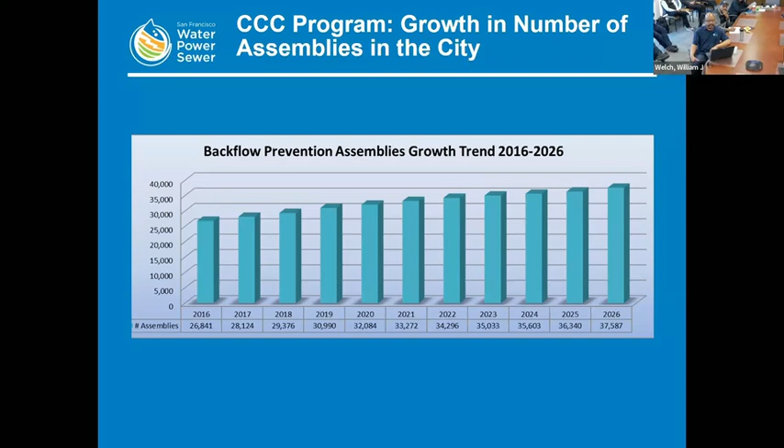In 2025, the number of assemblies in San Francisco grew at an annual rate of about 2%, increasing by over 700 assemblies. The testing business continues to expand, and we expect to have over 37,500 assemblies in the city by the end of 2026. Instructions for authorized backflow prevention assembly testers have been updated and will soon be posted on our website, available at sfpuc.gov/backflow.

Last September, we revised our rules and regulations, Section G, so it aligns more closely with the state cross-connection control policy handbook. These regulations apply to testers, specialists, and companies that employ them. So I highly recommend that you read them. There is a link to Section G on our website at sfpuc.gov/backflow. We also submitted our cross-connection control plan and program manual to the state as required by the policy handbook. The draft is also available on our website.

Water Quality Division now requires that all buildings 4 or more stories tall or with water supply more than 40 feet above the water meter have RPs at the point of connection. Water Quality Division may allow double checks instead of RPs if flooding is a concern, meaning that an RP would create a substantial risk to life or property. The property owner would have to apply for a variance from Water Quality Division. DCs installed before 2026 are considered to be in compliance, although future replacements must be with an RP unless Water Quality authorizes a double check.

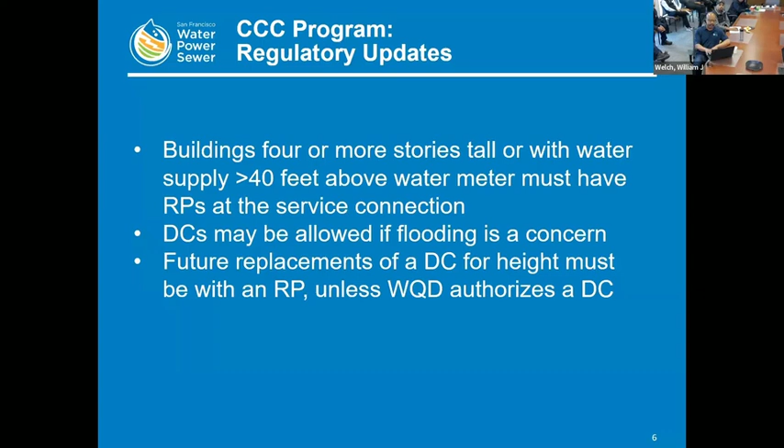We met with our advisory committee of volunteers from the tester community last October. We really appreciate the committee's feedback on our cross-connection control program. We discussed how different jurisdictions are conducting hazard assessments, which are required by the state's cross-connection control policy handbook. It was also suggested that Water Quality Division might require testers to use the only gauge approved by USC, which is a 3-needle valve arbiter. However, Water Quality Division currently has no plans to require this upgrade.

Also at the meeting, we were asked about procedures for restricted spaces. If you believe that an assembly is in an unsafe location for testing, contact Water Quality Division, and if applicable, we will work with Environmental Health and DBI to try to address your concern. Please send us pictures of your safety concerns.

We had a question about DBI approval or rejections of drains for installed RPs. If you have a specific question, you can ask DBI during the question and answer period or as issues arise. We had a question about whether failed or unrepairable DCs on buildings with low hazards could be replaced with double checks rather than RPs. Building owners may apply for a variance, which Water Quality Division will consider on a case-by-case basis.

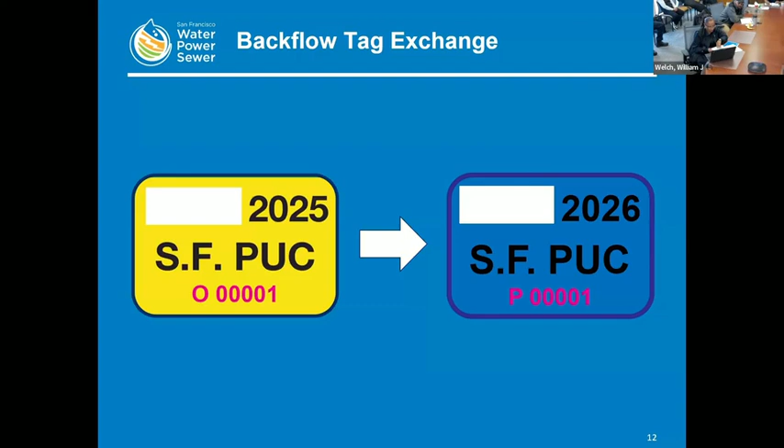We are currently in the process of upgrading our assembly tracking software to replace CCAMS. The new software will have similar capabilities as CCAMS, but will have a better user interface. It will be more manageable to navigate, find information, and enter test results. We will keep you posted as production approaches final stages. Testers will be notified in advance when it's time to register for the new software. Water Quality Division's software team will provide guidance on how to use it before the official launch.

A few things to keep in mind about CCAMS accounts. If you work for more than one company, you need a separate email address and password for each company. For example, if you work for 3 different companies, you'll need 3 separate accounts. To add an account, contact Water Quality Division. The contact information is given in the instructions for testers on our website. When entering test results, be sure to enter them under the company you are representing for that location.

CCAMS allows separate administrator accounts called supervisor accounts. These accounts provide a delegate to have read-only access to all the test reports submitted by the company. The person does not actually need to be a supervisor. If the supervisor is also a tester, he or she will need a separate tester account to enter test results.

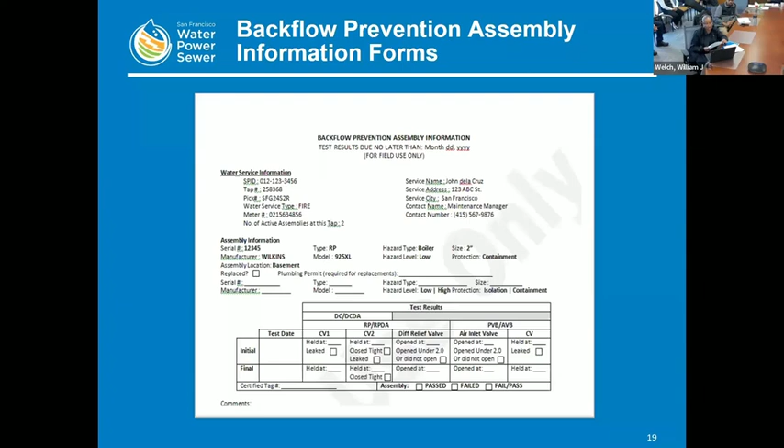Be on the lookout for multiple service connections, especially when testing at an unfamiliar location. There can be more than one PIC number, each associated with a different service connection. Very often, customers are not aware they have more than one service connection and mistakenly think that multiple notices are duplicates.

Remember that customers can authorize their testers via email to get PIC numbers directly from SFPUC. For example, if you notify your customer via email that their assemblies need testing, copy backflow@sfwater.org on the original message and ask the customer to reply all to authorize the release of the PIC numbers. PIC numbers will be emailed to the testers within 1 working day.

Alternatively, if a tester can provide Water Quality Division with written proof of customer authorization for testing, the Water Quality Division may release PIC numbers directly to testers. Proof might be a testing contract or email correspondence between the tester and the customer. And of course, if your customer is signed up with a CCAMS account and selects you as a preferred tester, you'll automatically receive the notices of testing due with PIC numbers.

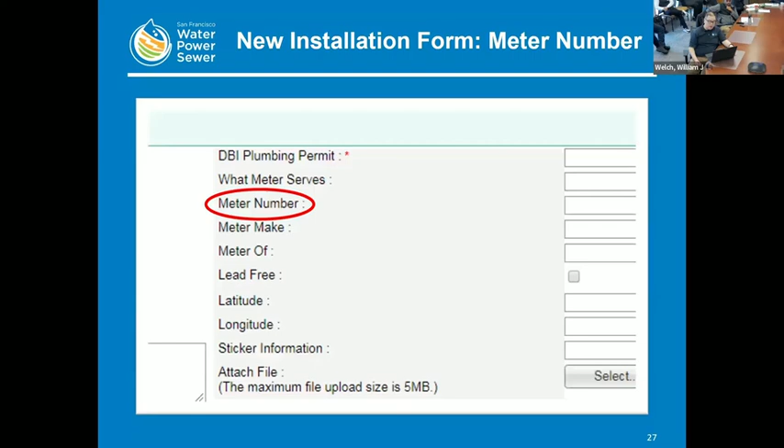If in doubt, contact Water Quality Division and we'll check CCAMS to see if the assembly's serial number has already been entered. If an assembly has a backflow prevention assembly information form, it's already in CCAMS and test results should be entered using the PIC number on the form. When entering a new installation, start on the Assembly Management/Add Assembly tab. Please enter the meter number at the service connection because it's really helpful for associating the correct customer with a particular backflow prevention assembly.

Enter the assembly orientation. The drop-down menu on the new installation form only includes USC-approved orientations, so you won't be able to enter an incorrect orientation. You can also check the correct orientation on USC's website at usclist.com. If a correct orientation is not shown in the drop-down menu, email Water Quality Division at backflow@sfwater.org.

If we confirm the orientation on the USC website, we'll add the orientation to CCAMS. The same goes for make, model, and size. If CCAMS is missing a USC approved assembly, please let us know. You can't rely on an assembly cut sheet. Assemblies must be installed in the orientation approved by USC.

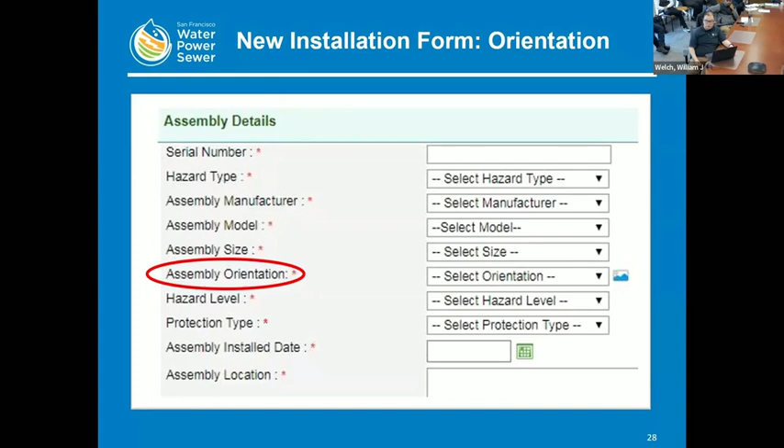If you're not familiar with all the orientations, USC provides an orientation key for reference. These orientations should be used when you are entering new installations or updating assembly information in CCAMS. Be sure to note the direction of the water flow through the assembly and the shutoff valves.

If a new assembly is in violation, check the in violation box in the unable to test section. Examples of the violations include modifications, incorrect orientation, or an assembly that is not on USC's list of approved assemblies. If you cannot test a new assembly for a different reason, email Water Quality Division with the assembly's make, model, serial number, size, location, and hazard if you know it.

For example, you might not be able to test because an assembly has no water supply, or the customer will not give you permission to test it. Once we have the assembly information, we will enter it into CCAMS and send the customer a notice to test the assembly. For an assembly not on the site's paperwork with a backflow tag that is out of date, call Water Quality Division, which will either provide a PIC number or ask that the assembly be entered as a new assembly.

A quick comment about the comments field. CCAMS gives testers several opportunities to enter comments. Please only enter information that is actionable for the water quality staff, such as a correction for a serial number, a hazard, protection type, or assembly location. If any part of the serial number, make, model, and size needs to be corrected, please provide all the information for the assembly. Please do not leave personal field notes that don't need to be reviewed by water quality staff.

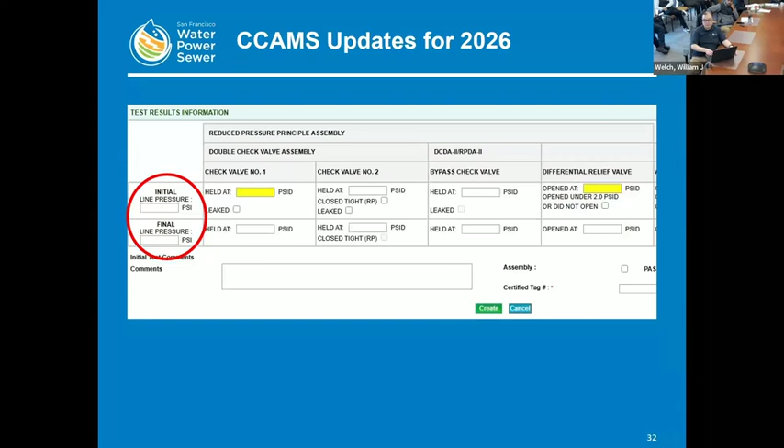Effective today, we now require that testers record the initial and final line pressures for all passing tests in CCAMS. CCAMS now accepts results of air gap inspections. So far, Water Quality Division has been inspecting air gaps, but starting today, we will accept inspection reports by authorized testers and specialists. To access this screen, go to the Assembly Management tab.

To add a new air gap, click on Add Assembly and choose Air Gap. Obviously, a serial number isn't applicable. Neither is the assembly information. You will need to enter the supplied pipe diameter and the distance of the air gap. If the air gap conforms to California Plumbing Code requirements, affix a backflow tag on the supply line near the air gap, if convenient, or other suitable locations.

For new installations, please submit 2 photos, one close up, preferably including a ruler or a gauge next to the air gap, and 1 photo showing the affixed backflow tag. For an existing assembly, you'll use a PIC number to reach this screen as you would for an assembly. For existing assemblies, please submit a photo of the current affixed backflow tag.

You must select whether an assembly is for containment at the service connection or isolation of an internal hazard. The choice affects the hazard types that are available in the drop-down menu. Consider asking the building owner or the building manager what the assembly is supplying water to if it isn't obvious. If a hazard isn't in the drop-down menu, please select Other and describe the hazard in the comments field. You can also email Water Quality Division to ask about adding a new hazard.

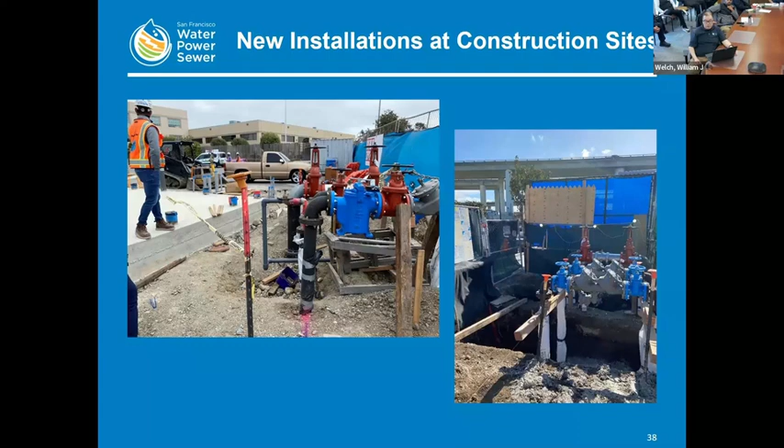Sometimes you might be hired to test assemblies at construction sites before the address or eventual owner has been determined. You might be given an address that is only temporary or one address that is associated with multiple buildings. When the Water Quality Division later tries to associate assemblies with the correct water service, it can be difficult since the address might have changed. In these cases, it would be very helpful if you can provide photos of the surroundings to provide context.

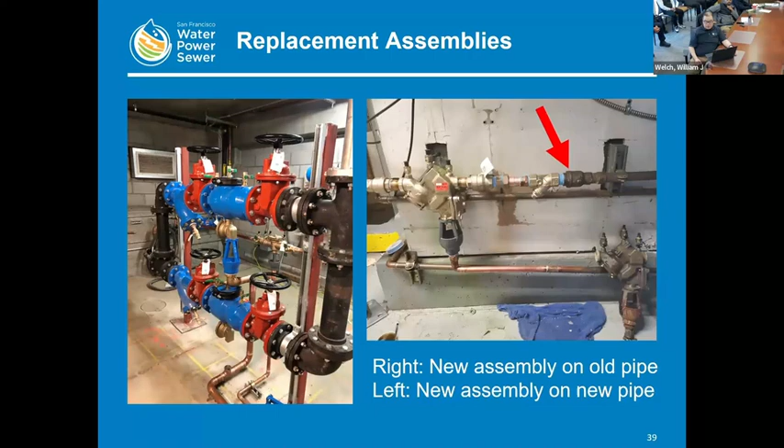There's been some confusion about when to enter an assembly as a new installation or a replacement. An apparently new assembly that has a serial number different from the one on the site's paperwork, but the same size and type of assembly supplying the same piece of equipment in the same location, is likely a replacement. Inform Water Quality Division and upload photos using the request feature in CCAMs. Shiny new assemblies without a backflow tag on new piping are obviously new and should be reported on the new installation form. Don't worry if you didn't do the replacement yourself. We just need to be able to link the new and old assemblies in CCAMs.

When an existing backflow prevention assembly is being changed out, the new assembly must be entered into CCAMs as a replacement assembly. If the assembly being replaced was tested, be sure to record the results of the test in the initial test area of the form. For the new assembly, mark the checkbox next to replacement information below and enter the replacement information in the fields provided. Then record the test results for the new assembly in the final test area of the form.

It is important that the information for both the old and new assemblies be reported on the same form. That way, the correct serial number and associated assembly will be inactivated, and the old and new assemblies will be tied together in CCAMs.

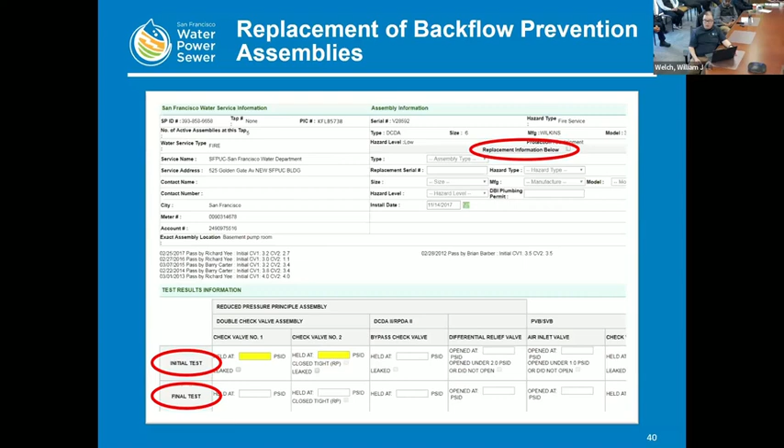Entering the replacements in CCAMs can be a bit tricky when DCDA Type 2s and RPDA Type 2s are involved. CCAMs considers a DCDA and DC bypass to be different assemblies requiring 2 tags and 2 entries for test results. However, a DCDA Type 2 or an RPDA Type 2 is considered one assembly in CCAMs. Therefore, sometimes a replacement is considered 1 for 1 and sometimes 1 for 2 in CCAMs.

If an assembly with a bypass is replaced with a DCDA Type 2 or RPDA Type 2, then report the new assembly on the same form as the removed main line assembly. Report the removal of the bypass assembly separately by selecting Unable to Test and then Removed.

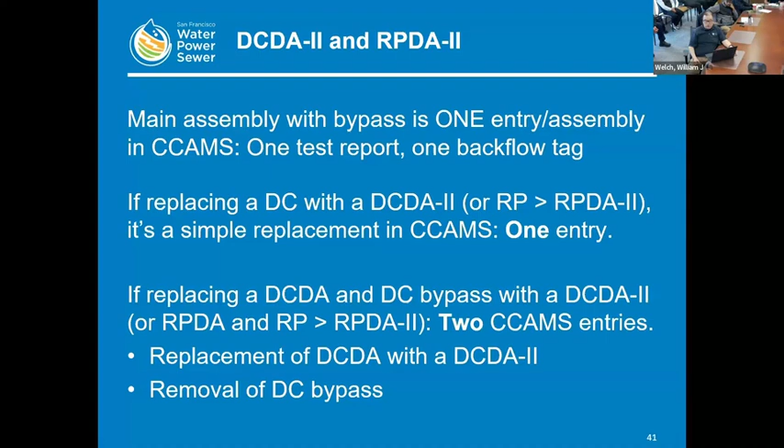If a DCDA Type 2 or an RPDA Type 2 is replaced with an assembly having a bypass, then report the new mainline assembly on the same form as the removed DCDA Type 2 or RPDA Type 2, and report the new bypass assembly as a new installation. Be sure to report the removal of bypasses in CCAMs. This is important because otherwise your customer will receive a test notice for the removed bypass.

Removals must be recorded in CCAMs. For example, if you get to a site to test an assembly and it isn't there, report it in CCAMs. Go to the Unable to Test screen and check Removed. Enter the plumbing permit ID if you know it. If not, click the No Permit button and the assembly will be referred to Environmental Health as removed without a permit. This screen has options for other permitting jurisdictions besides DBI.

You will need to enter whether or not the hazard was removed along with the assembly, for example, a boiler associated with an RP. You will also need to confirm the hazard type. If you happen to know that the assembly will be replaced, for example, as part of a remodel, report that removal of the original assembly as soon as you are aware of it.

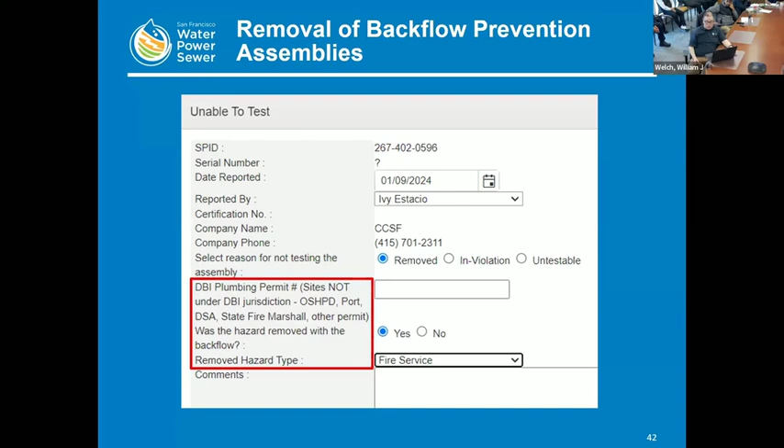If you are hired to test the replacement assembly sometime later, do not enter it as a new installation. Just send an email to backflow@sfwater.org and we will reactivate the removed assembly in CCAMs. Then you'll be able to enter the results for a new assembly on a replacement screen.

If customers want to provide Water Quality Division with preferred contact information that is different from their billing contact information, they should contact Water Quality Division at backflow@sfwater.org. You can also change test dates to another month or sync multiple accounts. For the initial change, some assemblies might need to be tested more than once in that year of the change.

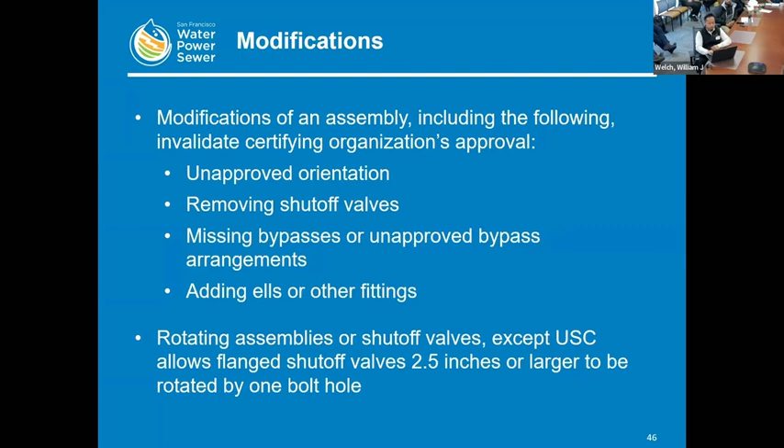The only exception allowed by USC is that flanged shutoff valves 2.5 inches or larger may be rotated by one bolt hole. The USC Foundation identifies an assembly as a unit from shutoff valve to shutoff valve. Therefore, modifications between the shutoff valves are considered modifications to the assembly and are not allowed. On the other hand, modifications upstream of the number 1 shutoff valve or downstream of the number 2 shutoff valve are not considered modifications that would invalidate approval.

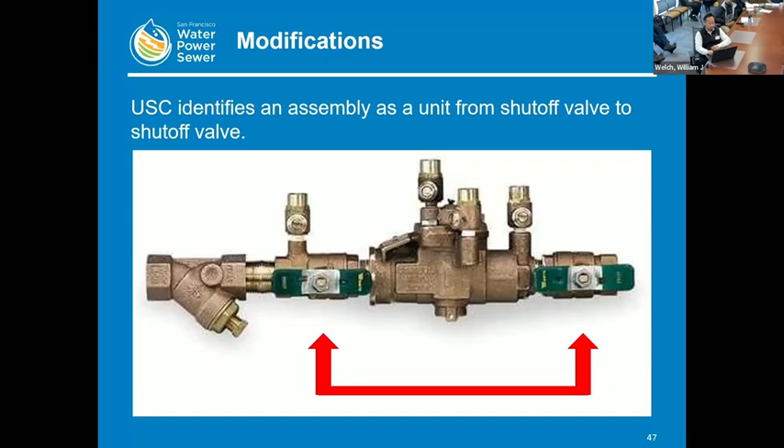For example, placing a Y strainer upstream of the number 1 shutoff valve is allowed. However, if the Y strainer is installed between the shutoff valve and the main body, it is considered a modification, and that invalidates the approval.

Reporting in-violation assemblies. Testers are responsible for identifying and reporting problems in the field. In particular, if you see a cross connection or observed backflow, report it immediately to Water Quality Division by emailing or calling the same day. Please do not assume that an assembly is approved if it was just installed or tested previously. If you find an assembly that has been modified or is in violation for some reason, report the information in CCAMs by clicking the link Unable to Test.

Then select In Violation and choose the violation types. Please select all violations that apply and describe them in the comments field. Do not test the assembly and do not submit a failed test. The violations will need to be corrected before the assembly is unlocked and tests can be submitted in CCAMs.

After submitting an assembly as in violation, you have the option of uploading photos of the untestable assembly. The upload screen will look like the one that Water Quality showed for new installations and replacements. Please use this upload functionality instead of emailing photos directly to Water Quality.

Violation types. When marking an assembly as in violation in CCAMs, select the best reason or reasons why the assembly is in violation. Selecting all relevant violation types is important as they might be used in the notice of violation, by Water Quality Division staff when talking to confused customers, by plumbers correcting the violations, or by other testers. If you would like more information or examples of all violation types, please refer to the cross-connection control handout.

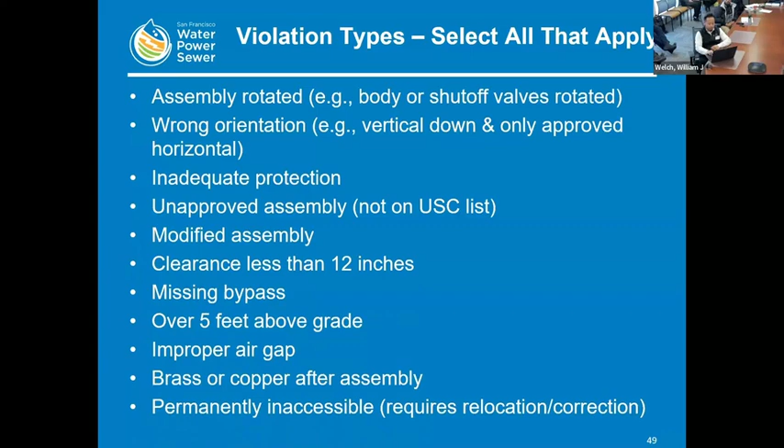All right, it's participation time. Now that we've reviewed the violation types, let's check the knowledge. Examine the following scenarios as if you were out in the field preparing to test the backflow assemblies. Are the assemblies allowed, or should they be marked in violation?

After showing each photo, we'll switch to the poll where you'll be able to select yes or no. For each scenario, please think about what violation types you may need to report in CCAMs. However, please disregard violations that are difficult to confirm from the photos provided.

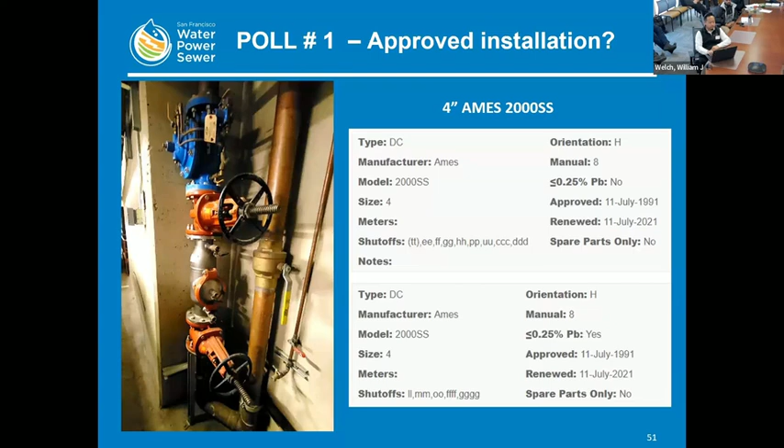All right, examine the backflow installation in the photo. Is it installed in an approved orientation? Although it may be hard to see all the details in the photo, are there obvious violations you should report? All right, the answer is no. The assembly is not installed correctly and should be marked in violation with the violation type wrong orientation.

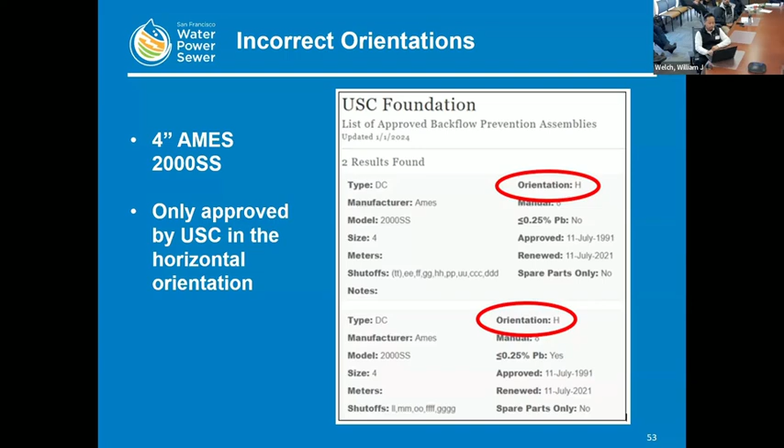Incorrect orientations. Remember to check the approved orientations on the USC list or ASSE standard. USC has only approved the 2000 SS shown in the poll photo in the horizontal orientation. Therefore, the backflow assembly in poll number 1 is considered in violation as it is installed in a vertical orientation. It should not be tested until it is reoriented to a horizontal orientation or replaced.

Also, if an assembly is installed in a vertical orientation, check the water flow to confirm the assembly is oriented correctly, as the approval may only be for one direction. USC approvals differentiate between vertical up and vertical down.

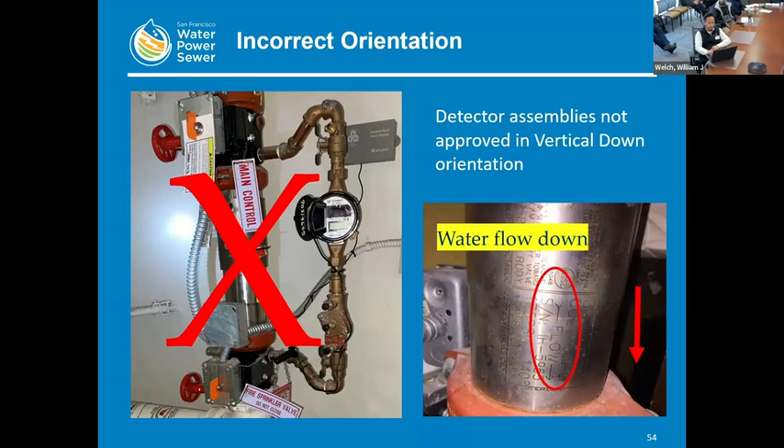Please be aware that testers continue to find DCDA and RPDA orientation violations on fire services. Currently, I do not believe there are any detector assemblies approved in the vertical down orientation. Therefore, if you see any in a vertical down orientation in the field, they should immediately send up a red flag.

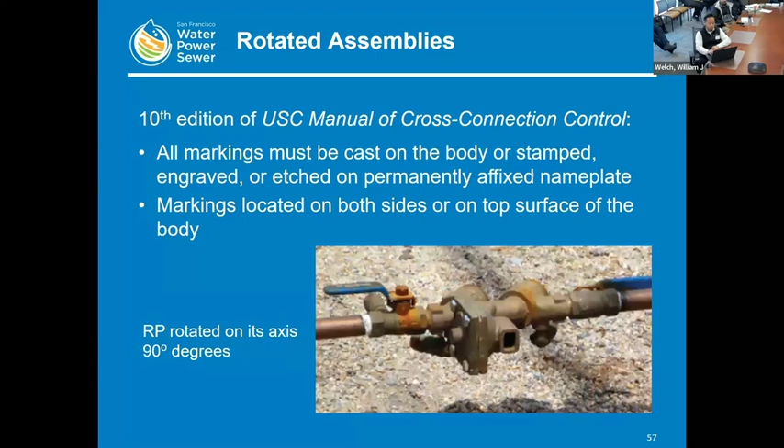All markings must be cast on the body or stamped, engraved, or etched on a nameplate permanently attached to the body. And they should either be located on the top or both sides of the body. Therefore, an identification tag on the bottom of an assembly should send up a red flag since it suggests the assembly has been rotated. This RP is rotated on its axis 90 degrees and would be considered in violation. The assembly should be reported in CCAMs as in violation with the violation type assembly rotated.

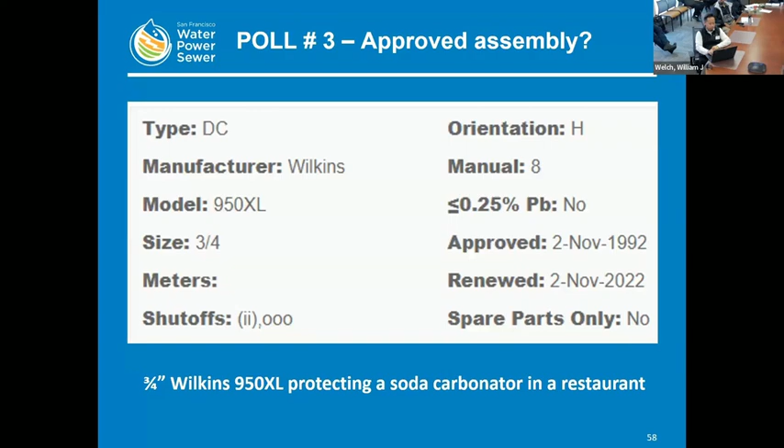The last poll, you are called to test a newly installed 3/4 inch Wilkins 950 XL protecting a soda carbonator in a restaurant. Does this assembly provide adequate protection? If not, why not? No, the assembly does not provide adequate protection for a carbonator. The assembly should be marked in violation with the violation type inadequate protection.

This is a DC. Soda machines and beverage carbonators in San Francisco require an RP. There's an exception if the entire system does not contain copper pipe, but this is rare. In addition, please keep in mind that all piping material downstream of the RP must not be made of copper, brass, or other materials affected by carbon dioxide.

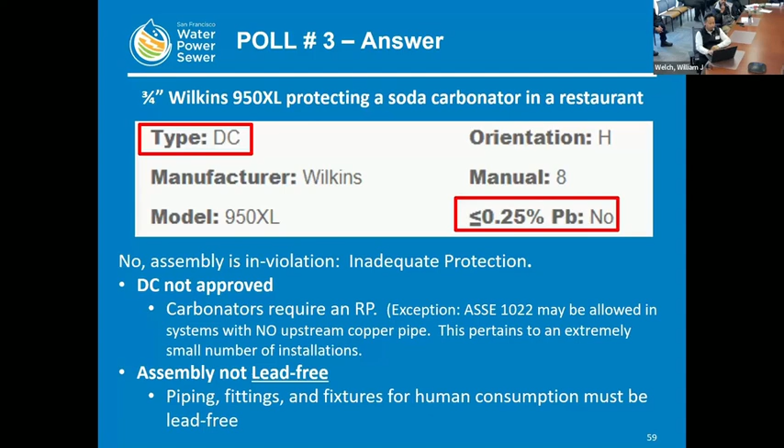A second reason the assembly is in violation is because of the lead content. All piping, fittings, fixtures, and backflow prevention assemblies intended to convey potable water for human consumption and installed after January 1st, 2010 are required to meet lead-free requirements.

Permits to operate. All testers and specialists operating in the city must maintain a valid permit to operate from the San Francisco Department of Public Health, Environmental Health Branch. There are 2 types of different permits: authorized backflow prevention tester and authorized cross-connection control specialist. The permit to operate is issued when your permit application is approved by Environmental Health.

To maintain a valid permit, you must abide by tester and specialist responsibilities. You'll need to submit your backflow prevention assembly tester certification from AWWA or another approved testing organization every 3 years, or your cross-connection control specialist certification every 2 years. Testers will have to submit test kit calibrations annually, and general liability insurance, $2 million each occurrence combined single limit. For specialists who won't be testing assemblies in San Francisco, we're still considering insurance requirements.

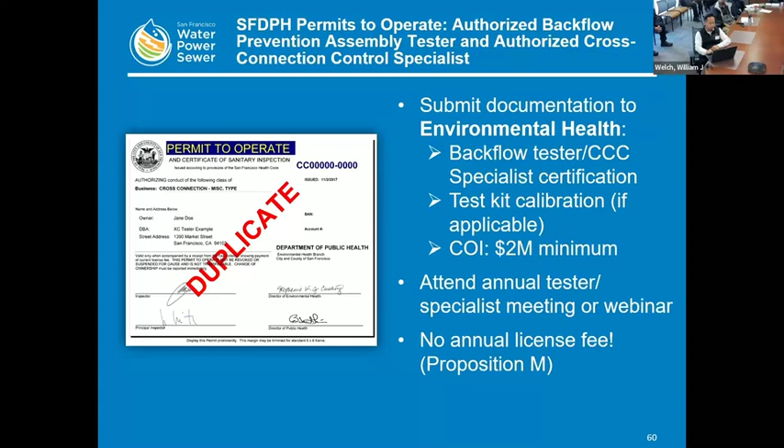Testers and specialists will also have to attend our annual tester meeting or complete the alternative webinar and abide by the San Francisco rules and regulations for backflow testers and specialists. I'm also pleased to announce that as of April 1st of this year, the city will not be charging an annual license fee to renew your permits to operate.

Testers should keep an eye out for alerts when they log into CCAMs. On the home screen, alerts appear for liability insurance, test kit calibrations, and backflow tester certifications that will be expiring. Email notifications may also be sent to the tester or test company from CCAMs. To maintain an active permit and prevent getting locked out of CCAMs, email copies of your current documentation to Environmental Health at least a week before the expiration dates.

Billing and license certificates. The permit and license belong to the tester, but the certificates will be mailed to the testers at their company address. The billing cycle runs from April 1st to March 31st of the following year. Licenses are mailed out by the city tax collector. Remember to notify Environmental Health of employment and address changes so that you receive your license in the mail. If you do not receive your license, please contact Environmental Health.

Our goal is to encourage compliance with tester responsibilities to support the cross-connection control program. Our intention is not to be punitive. However, tester permits to operate may be suspended or revoked for violations including late entry of test results more than 5 business days after the test. We are emphasizing enforcement for late entries that trigger the next action.

Although you should always try to submit results within 5 business days, we understand that circumstances occasionally prevent this from happening. However, late test results can confuse or frustrate customers, create unnecessary work for cross-connection control program staff, and interfere with the status of backflow prevention assembly compliance in San Francisco. At the beginning of the next month, another action will occur, such as a second notice from Water Quality Division, a notice of violation from Environmental Health, and a citation and/or administrative penalties. Therefore, at the end of each month, please double check to make sure you have submitted all tests for that month.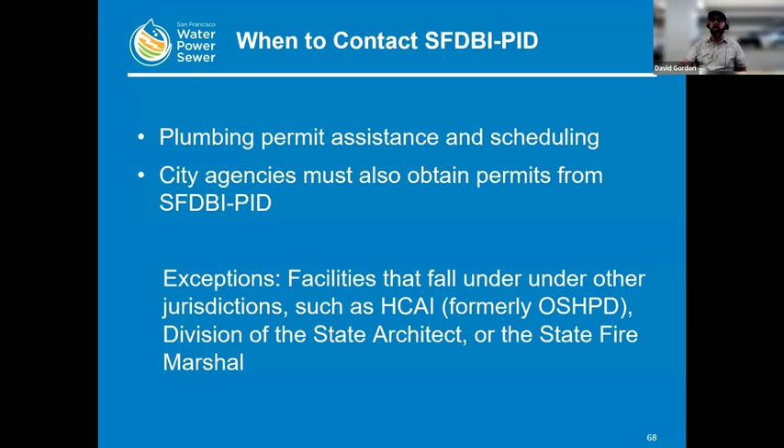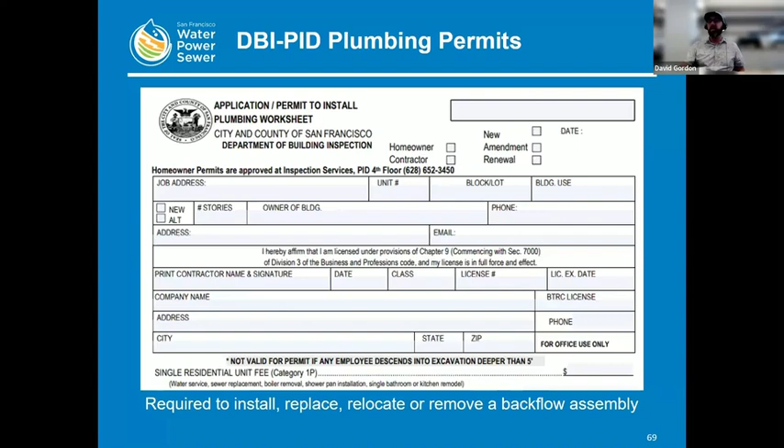Only a licensed contractor may install, remove, replace, or relocate a backflow prevention assembly. A plumbing permit for the work must be obtained from DBI Plumbing Inspection Division. City plumbers may also pull permits. Contact DBI if you have any questions. Installations, including a bypass to an existing assembly, replacements, relocations, and removals require a plumbing permit. If you have questions regarding plumbing permits or the permit process, please contact our office.

Plumbing permits can be pulled using the online permit website or by visiting our office at 49 South Van Ness on the second floor. Once a permit is pulled, plumbing inspections can be scheduled online or by calling inspection services or by calling our automated scheduling number. The DBI permit tracking website can be used to check the status of a permit.

In CCAMs, you'll need to enter the permit number when submitting new installations, replacements, and/or removals. If you do not have the permit number when you are submitting the test, you or the customer must provide the completed permit number to Water Quality Division later. If a facility does not fall under DBI jurisdiction, submit the approval or permit information from the authority having jurisdiction and indicate the authority issuing the permit.

As a reminder, DBI plumbing permits start with the letter P. Please be aware that building permits are not accepted in lieu of a plumbing permit. To ensure that the Water Quality Division has the information it needs to approve the new installations, replacements, and/or removals, and to unlock assemblies, ensure that the permit description is detailed.